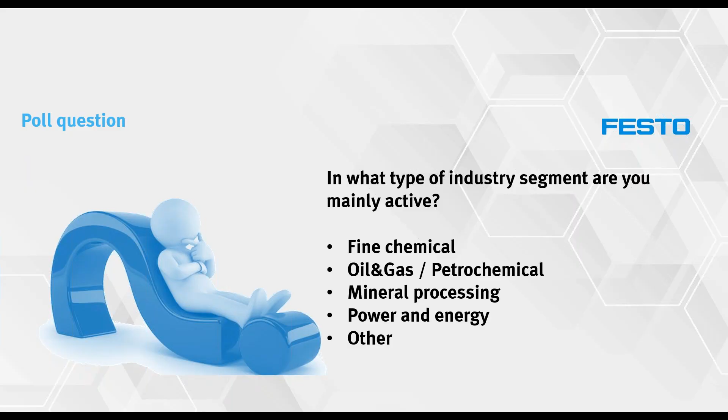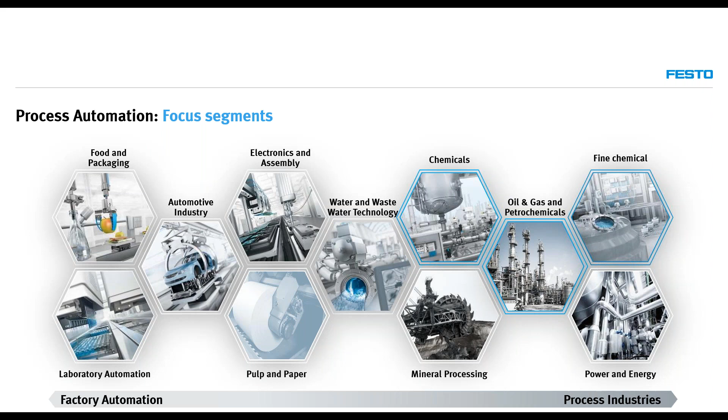For today's session, we would like to allocate some focus segments mainly related to chemical industries, fine chemical, oil and gas, and petrochemical industries. That doesn't mean that these are the only focused industries. We also have pulp and paper, water, wastewater, power and energy, and food and packaging. But for today's session, we will be highlighting products which are mainly applicable for chemical, fine chemical, oil and gas, and petrochemical industries.

Festo process automation products cover all individual levels of the automation pyramid, from the operating level up to the field level. Customers worldwide will receive their components from a single source, as a one-stop shop. For example, in the field level, we can offer our process valves, actuators, sensor boxes, and Namur valves. On the control level, we can contribute with our remote IOs, valve terminals, and control cabinets. In the DCS and SCADA system, we can contribute with our controllers, touch panels, and integrated touch panels with controllers.

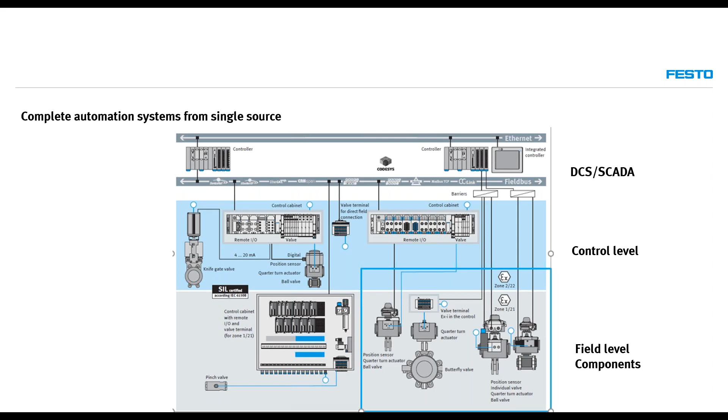Earlier, my colleague presented in the previous seminar the control cabinet solution for hazardous environments. For today's session, I will focus more on the field level components for process automation. On our agenda today, we will be discussing our quarter turn actuator for chemical industries, solenoid valves with high safety level and reliability, stainless steel filter regulators, and the Festo range of limit switch boxes.

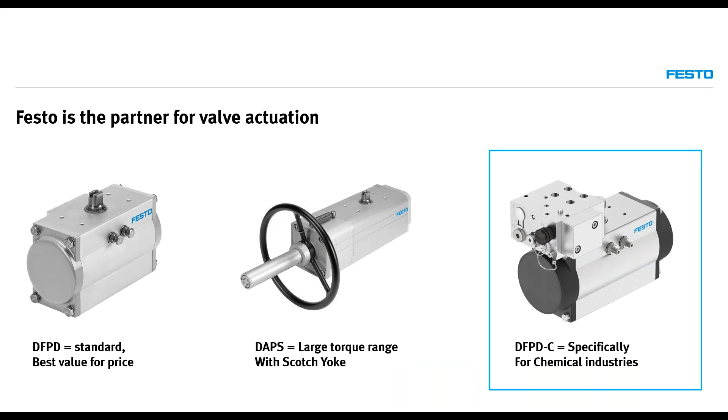In the field of rotary actuation, we have various types of actuators which are designed and developed based on each specific application. We have mainly 3 types of rotary actuators. We have the DFPD, the standard type, best value for price. We have our DAPS actuator for large torques with Scotch yoke design. It can handle up to 8,000 Newton meter torque. And we also have our DFPD chemical version, which is mainly for chemical industries. In this session, I will discuss further our DFPD chemical version.

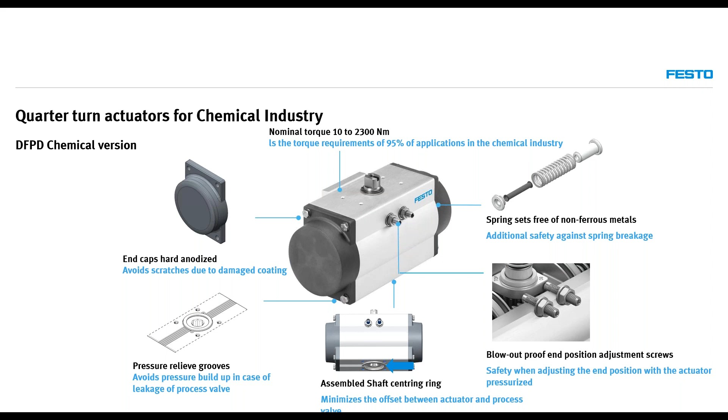The DFPD for chemical industries is suitable for actuating butterfly valves, plug valves, and ball valves in process plants in the chemical and petrochemical industries, and can also be used with a positioner for control applications. Let's start with some of the features of the DFPD actuator, the chemical version. It can handle up to 2,300 Newton meter torque, which can cover 95% of the applications. The springs for single acting actuators are free of non-ferrous metals, which leads to additional safety against breakage.

We also have this nice feature, the blowout proof end position adjustment screws. This design allows us to safely adjust the end positions without shutting down our system. The assembled shaft centering ring minimizes the offset between the actuator and the process valve itself. Also, in case of any leakage in the process valve, we will have a pressure buildup in the area between the actuator and the process valve. Therefore, we have these pressure relief grooves, on the bottom left, which avoid the pressure buildup in case of any leakage in the process valves.

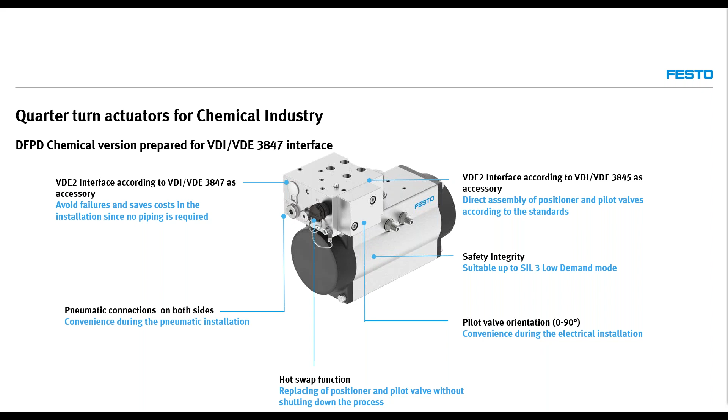Going further in the DFPD actuator, we have some more accessories which can be added to the DFPD actuator, the chemical version. For example, here we have the VDE2 variants, which give us more features and make us more flexible and able to cover more needs. The VDE2 interface allows us to directly assemble our positioner and pilot valve and avoid any failure with cost saving, since no piping is required in this installation.

Also to highlight here, when it comes to safety integrity, our DFPD chemical version actuator is suitable up to safety integrity level 3 low demand. By having this interface, we can control our pilot valve orientation 0 to 90 degrees. Also, we can have a pneumatic connection from both sides, which is very convenient during the electrical and pneumatic installation.

Last but not least, here the hot swap function. In many applications, it's very important to keep the process running. With the hot swap function, now it's possible to replace the positioner or the pilot valve without shutting down the system. It's very useful to use this specific function, which is the hot swap. By activating the hot swap, we can easily replace our pilot valve or positioner.

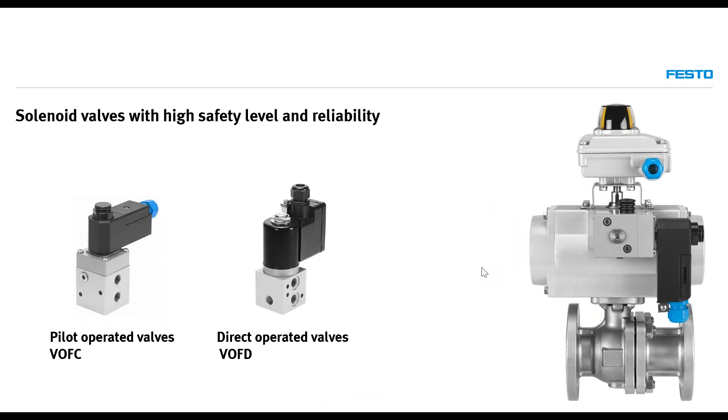I have one question here. What will happen to the Namur interface on the DFPD actuator if we are using the VDE2 interface? Actually, if you are ordering the VDE2 interface, you will receive in the delivery blanking plugs to be used to block the Namur interface ports. Then you are able to use the VDE2 interface directly.

Going back to our presentation here, when we talk about solenoid valves for high safety level and reliability, what comes to our mind is the VOFC and VOFD, which are the pilot operated and direct operated solenoid valves.

Some of the features and benefits of the solenoid valves VOFD and VOFC: by having direct operated and indirect operated 3/2 and 5/2 valves, we are able to cover all applications with reduced power consumption, which means we are now able to use the VOFD and VOFC controlled by fieldbus signals because of the low power consumption. Also, we have them with different explosion protection, which match different ATEX zones.

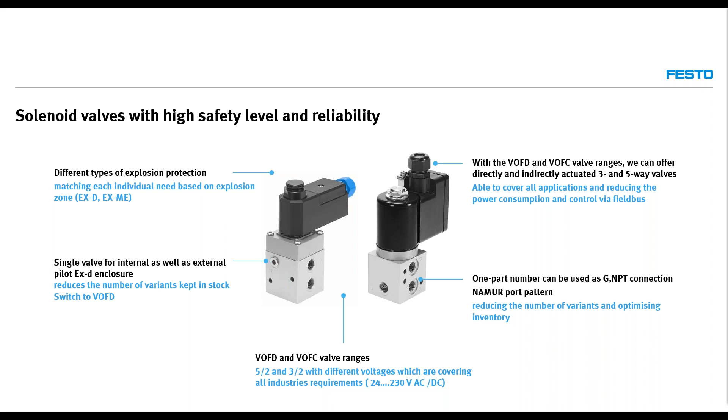Here also the combination of the 5/2 and 3/2 availability of those valves and the voltages, which cover 24 up to 230 volt AC and DC. Also, the VOFD and VOFC are suitable to be used in safety-related systems up to and including safety integrity level 3. It will also help us to calculate and assure the system reliability. Those valves have been time tested in actual use in plants, and they have proven their safety and reliability.

Also, when it comes to safety and reliability, if you are interested to know more about this application, visit our website, festo.ae.com, and type "15 years without failure"; you will find a white paper explaining this application and how the test was done.

As a standard feature, those valves are hard Ematal titanium oxide layer coated, which provides high protection against corrosion and mechanical stresses. Some of the accessories are important to highlight here when it comes to the pilot valve or solenoid valves. I'm highlighting the flow control plate, which has a direct connection between the actuator and the solenoid valve with no additional piping required.

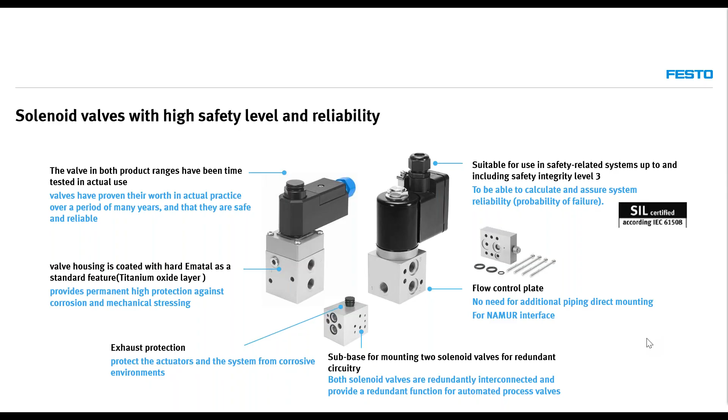This leads us to our second poll question. Please answer the most suitable answer for you. Which of the following levels is higher in safety? We are talking about safety integrity level. So is it safety integrity level 4 or 2 or 1 or 3? We are about to collect your answers. Please just click on the right answer. It will be directly linked to our webinar.

Now we will share the poll answers. Most of you, let's say 44%, answered safety integrity level 1. To be honest with you, this is not the right answer. Actually, the right answer is safety integrity level 4. So the higher the number, the safer the safety integrity level. Thank you for sharing your answers with us. Let's keep going with our presentation.

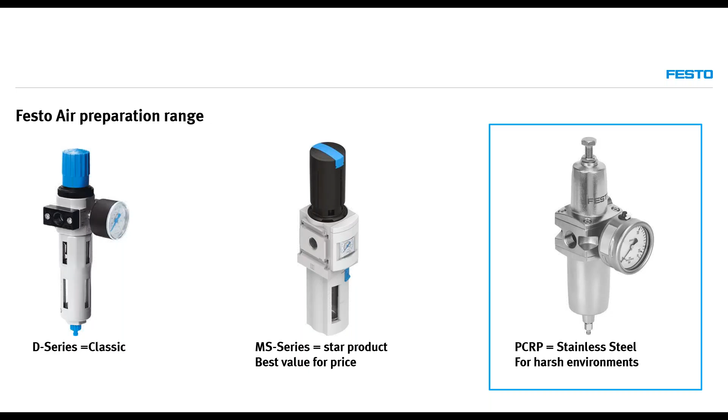Okay. Now we completed, let's say, the DFPD chemical version and solenoid valves, the VOFD and VOFC. Coming to the air preparation range, preparing the air before using it in the system is the first step to be taken into consideration. Therefore, as Festo, we offer various types of air preparation units and components as well. From our range, we have the D series. It's the classic product. Most of you already know this D series. Also, we have the MS series, our star product, best value for price. Also, since we are talking about chemical plants and harsh environments, we will be introducing the PCRP, the stainless steel version filter regulator for harsh environments.

Let's go for the features of the PCRP. Let's start with the housing and internal metal parts, which are fully stainless steel. This is to be protected against highly corrosive environments and to have longer service life. The material of the PCRP can be used in H2S containing environments in oil and gas production, NACE MR0175. With NACE MR0175, the materials are approved to be used in the petroleum and natural gas industries.

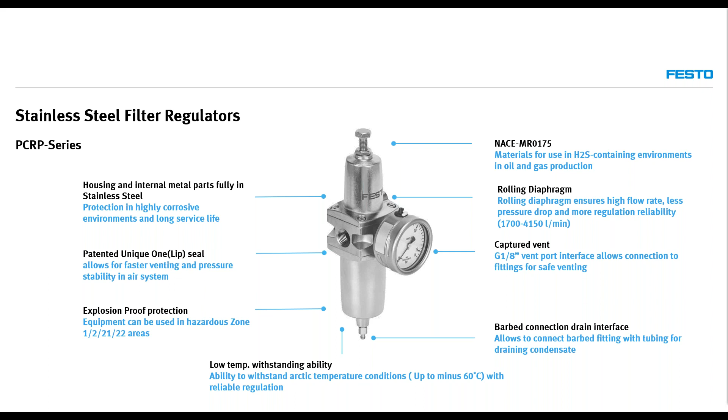Going further in our presentation to cover our Festo range of limit switch boxes. Actually, the main use of limit switch boxes is to know the status of the process valve, if it's open or closed, and make sure that our system is functioning 100%. To know if it's open or closed visually, or to have a feedback signal from the limit switch box to our system to understand the position of the process valve. Then based on, let's say, the ATEX zone, the function and the space, we can select the right limit switch for our application.

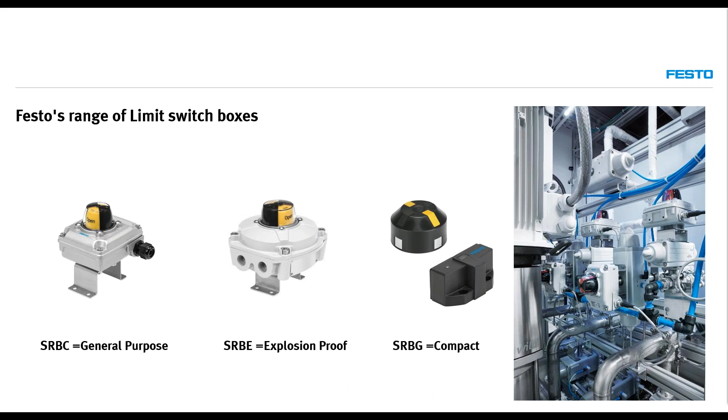So today we will be introducing some of our Festo limit switches. We will introduce three types of limit switches: the SRBC, the general purpose limit switch, the SRBE, the explosion-proof limit switch, and also the SRBG, the compact design limit switch.

As an overview of our first type, the SRBC limit switch box, we have it with an optical indicator for open and close. We have captive stainless steel bolts and two cable entries. We can select, if required, the M20 or the NPT half-inch cable entries. We have the stainless steel short Namur shaft. By ordering the SRBC, you will have a pre-assembled stainless steel mounting bracket available with the delivery, along with stainless steel screws. The housing will be epoxy coated aluminum.

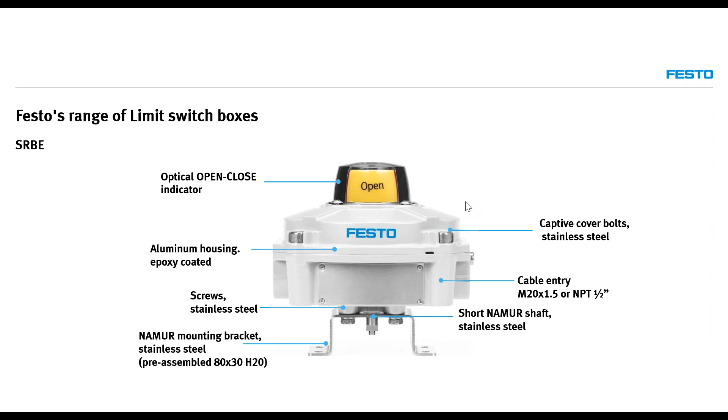Let's go further to understand more features about the SRBE, the explosion-proof limit switch box. We can use the same limit switch box worldwide due to the global approvals that we already have with the SRBE. As mentioned earlier, because of the thickness and type of the housing material, it's an EXD enclosure, which leads to easier installation due to the fact that intrinsically safe circuits are not required.

So it can be used with 230 volt AC signal, so there's no need to have an intrinsically safe circuit. Also, we have dual cable entries as well as a printed circuit board for direct connection of the limit switch box and the solenoid valve, which saves material and time for us. Also, make sure this is a very important point - not everybody takes this into consideration - to select the right or correct cable gland when selecting the variants of the limit switch box.

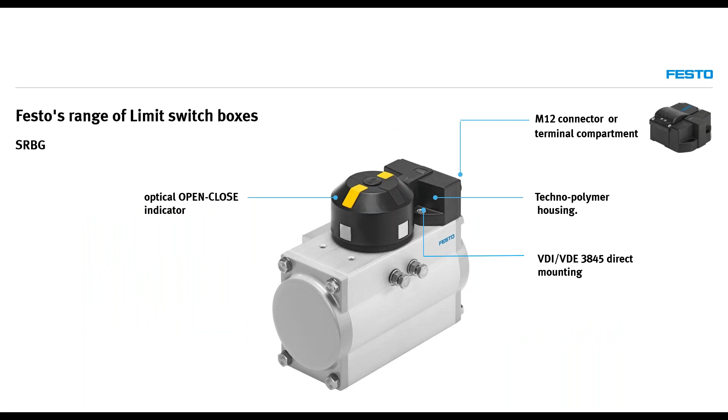Going further to our third type of limit switch boxes. This is the SRBG, the compact design from our limit switch boxes. This is an overview—it has an optical open and close indicator. Two connection types: M12 connector or terminal compartment. It's made out of technopolymer housing.

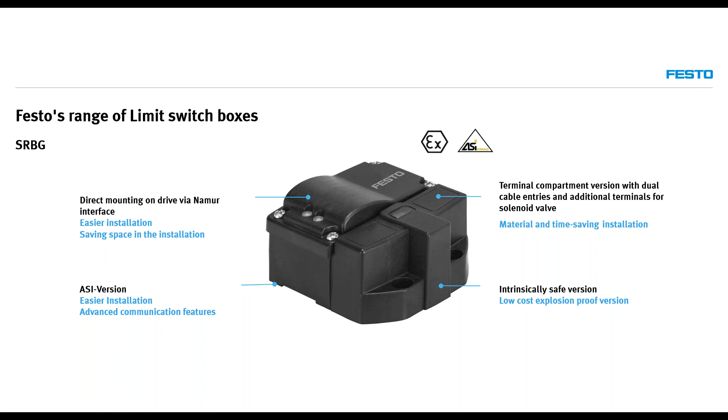The type of mounting is directly onto the actuator itself, VDI-VDE 3845 direct mounting, so no need to use any mounting brackets with the SRBG limit switch box. In some cases we have a hard time with space, so the SRBG is easier to install with space saving thanks to the direct mounting via Namur interface.

It also has an advanced communication feature, the ASI version—an industrial network solution used with the PLC for advanced communication—available with the SRBG for easier installation. Also dual cable entries with an additional terminal for the solenoid valve, which saves time and material. Low cost—this SRBG is considered a low cost explosion proof version by selecting the intrinsically safe version of this limit switch box.

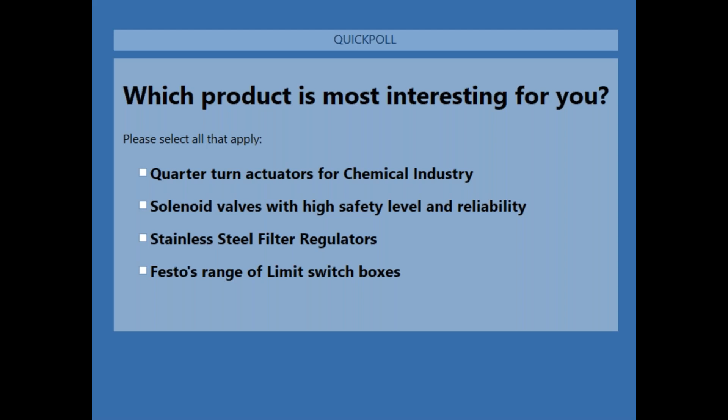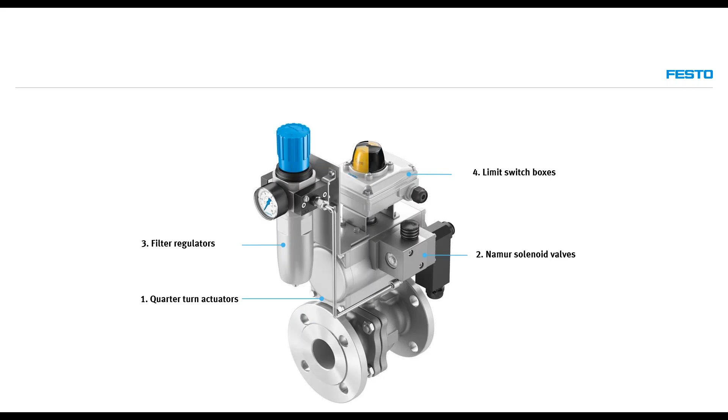Let me summarize what we covered today. We covered our quarter turn actuator and its features, and the VDI/VDE 3845 mechanical interface. Also our Namur solenoid valves, the VOFD and VOFC, and the safety integrity levels we have. Also the PCRP, the stainless steel version of our filter regulator for harsh environments. Finally, we covered the limit switch boxes—the SRBE, SRBC, and SRBG—and when to select the right limit switch box for your application.

Also, as Festo, we offer on our website more information, for example about the ATEX zones and their explanation. If you are interested to know more about the ATEX zones, visit our website and search for the ATEX poster. You will find this poster at the top left, explaining the ATEX zones.

Also, we have very interesting white papers on safety in process industries—what safety integrity levels and certificates are required in certain industries. Also, for the VOFD and VOFC, we mentioned they are time-tested solenoid valves. Please check our white paper on the 15 years without failure.